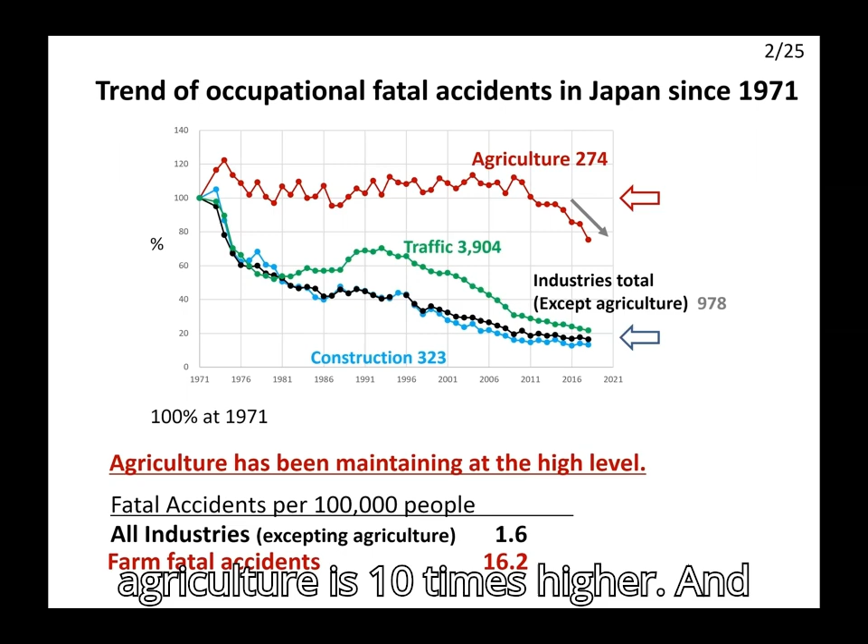Number 3. 60% of farm fatal accidents are caused by agricultural machinery. Among them, farm tractors are the worst. In 2017, 157 people were killed by agricultural vehicles. The injury accidents due to agricultural vehicles exceeded 20,000 per year. Based on the number of tractors, we may estimate 400,000 people are injured by farm tractors in the world.

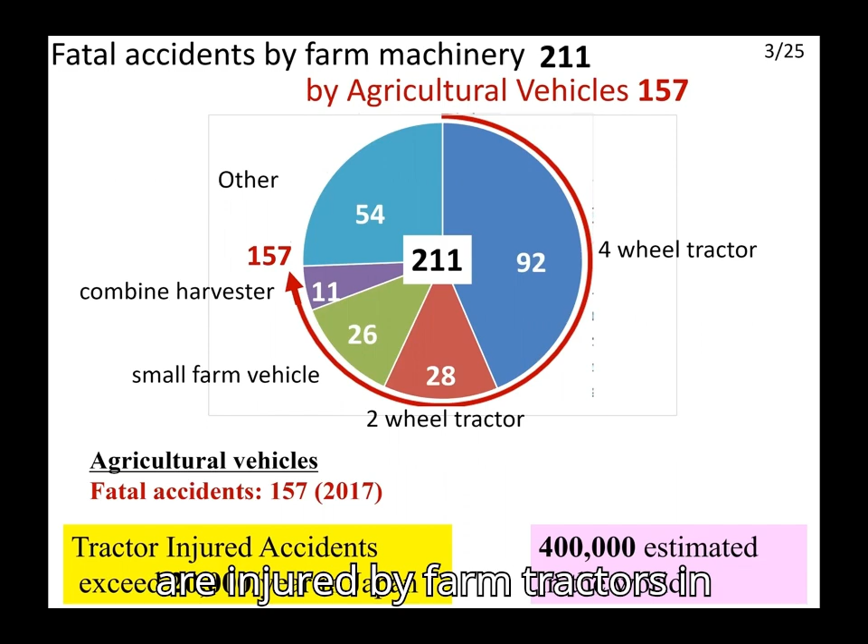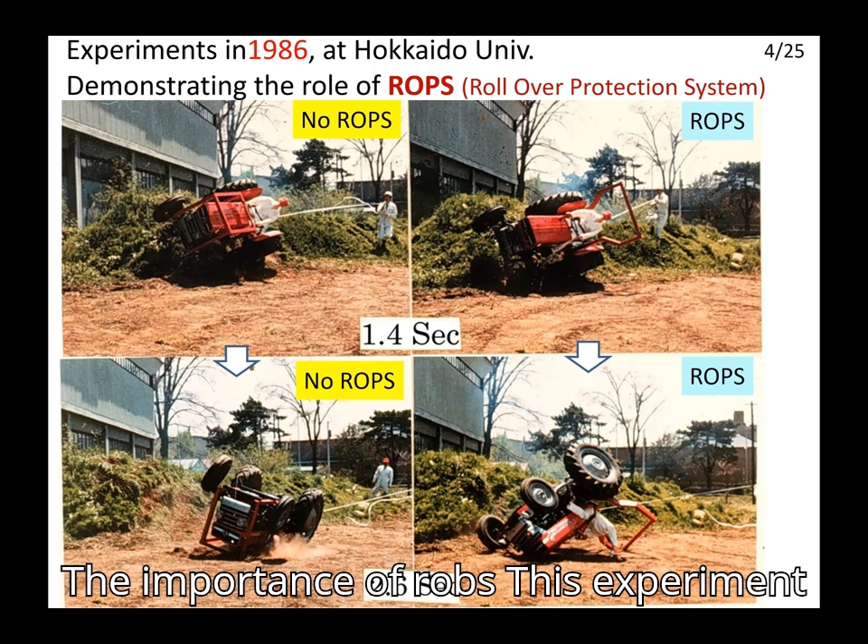Number 4. In the 1980s, ROPS was not popular in Japan. Hokkaido University demonstrated the serious importance of ROPS. This experiment was conducted in 1986. A mannequin was put on the seat.

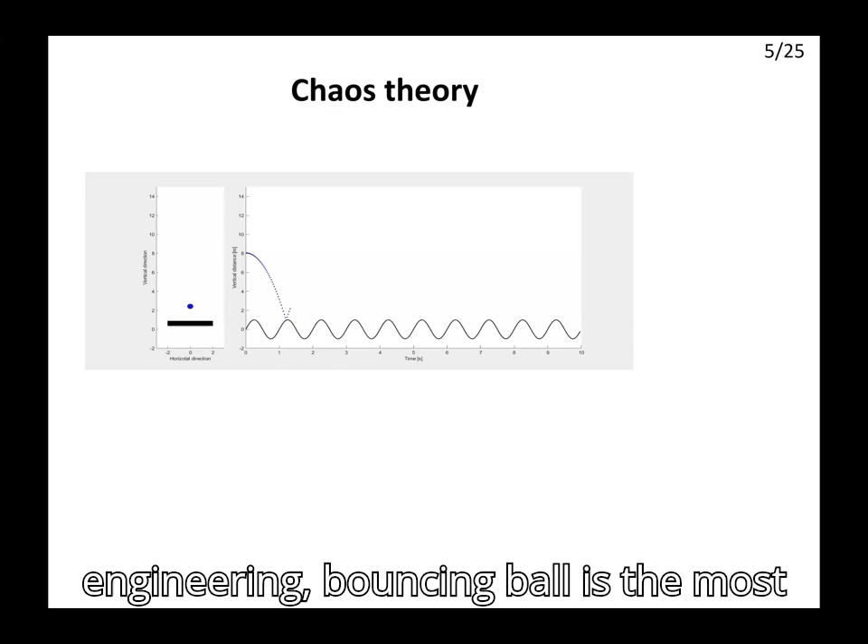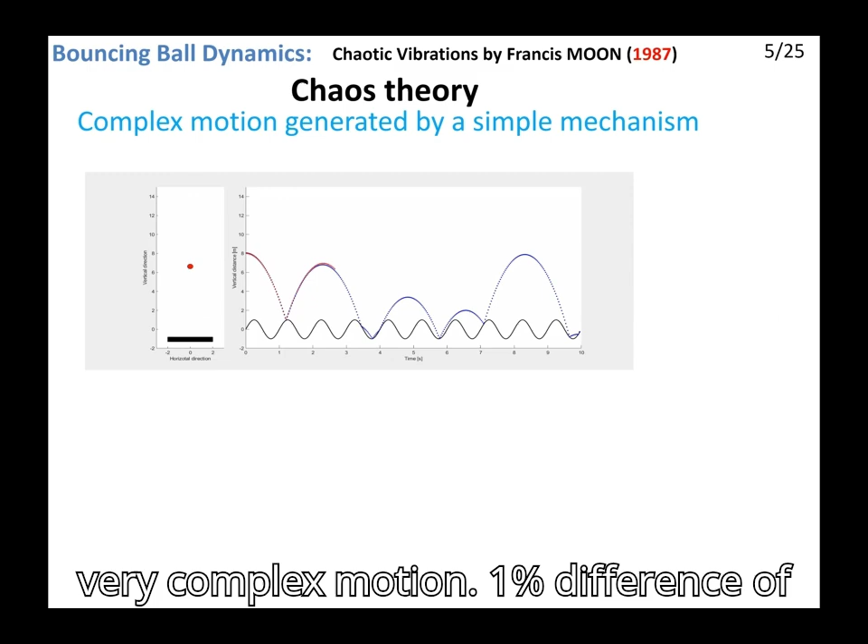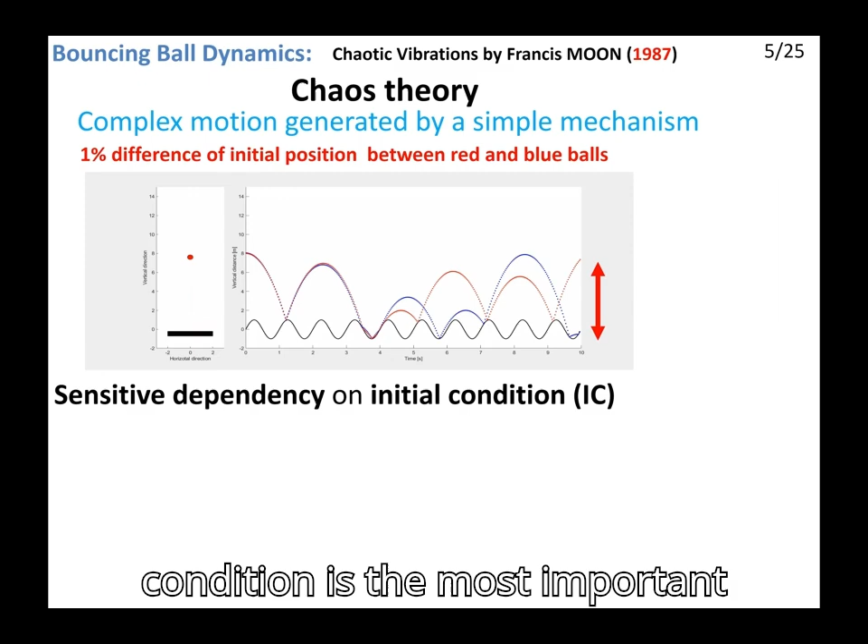Number 5. In mechanical engineering, the bouncing ball is the most popular model to explain chaos theory. I purchased this book at the UC Davis bookstore. A free fall elastic ball repeats collisions with a moving table. The trajectory of the ball shows very complex motion. A 1% difference of initial position evolved exponentially and the two balls showed no relationship. This sensitive dependency on the initial condition is the most important characteristic of deterministic chaos. This causes unexpected, unpredicted consequences even with very small changes of parameters.

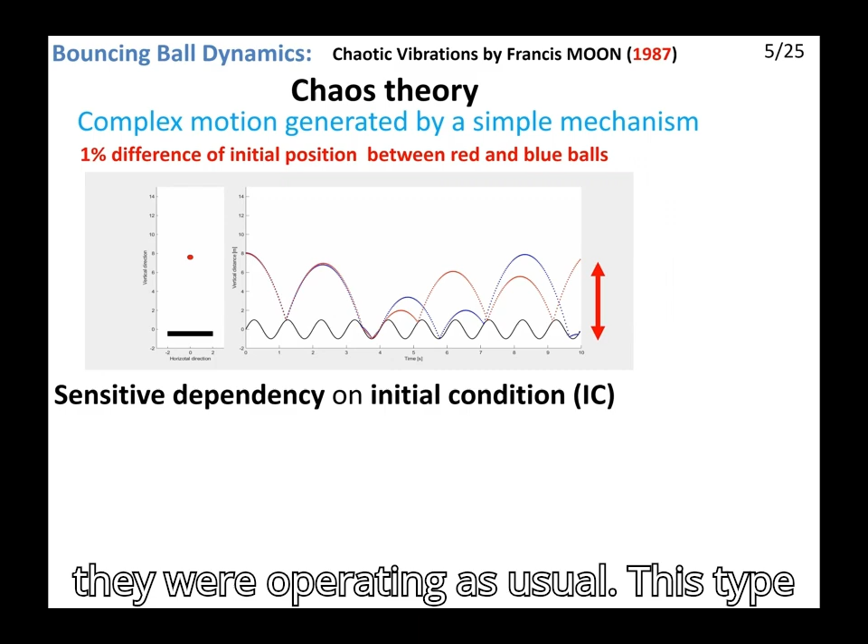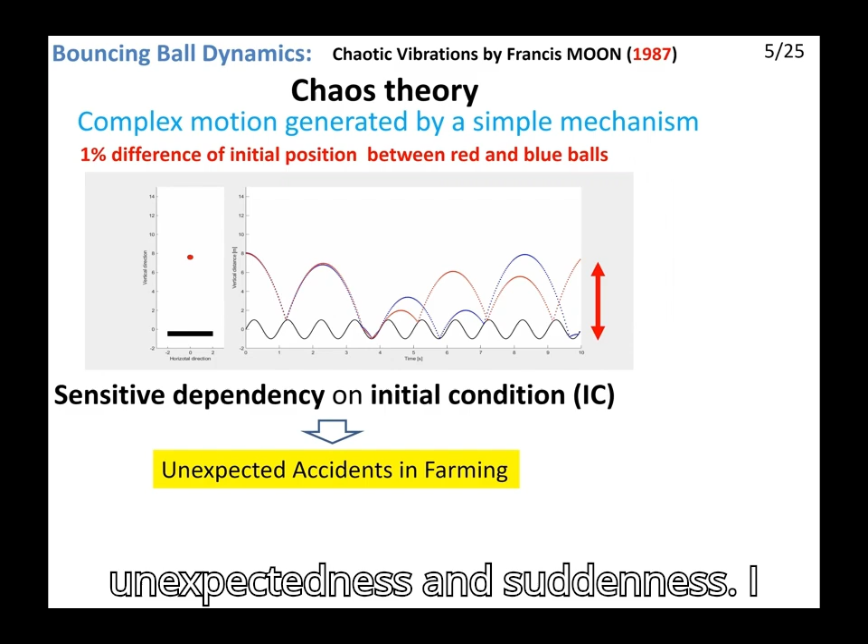Farmers always say that their accidents were not expected because they were operating as usual. This type of mention is typical in many reports from surveying farm accidents. Farming accidents were usually attributed to trivial things and emphasized unexpectedness and suddenness. I conceived that sensitive dependency on parameters in tractors is key to understanding the dangerous behaviors of tractors.

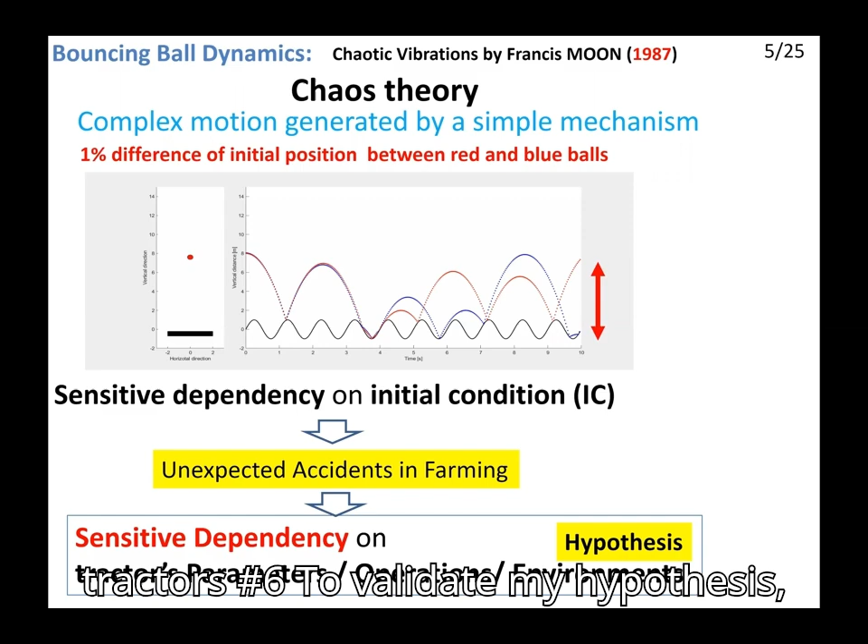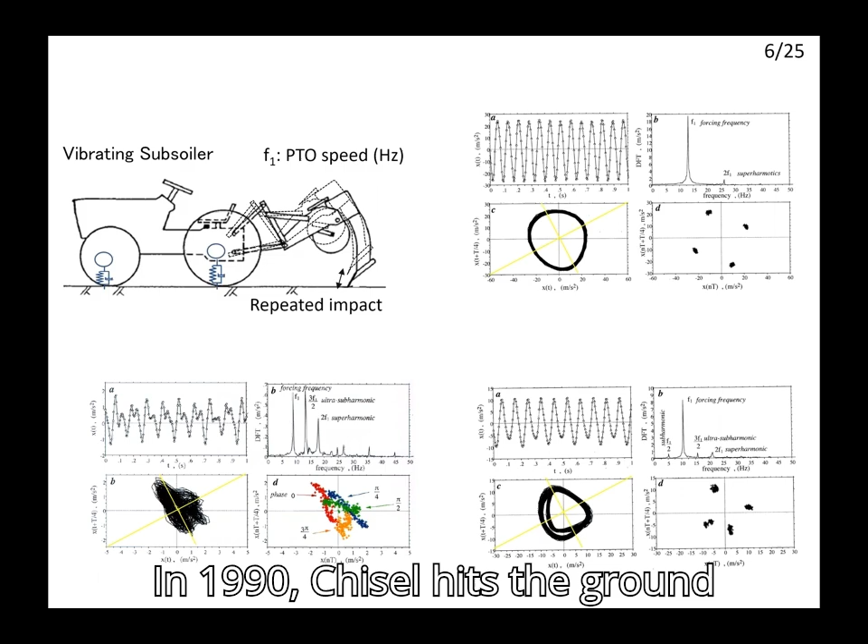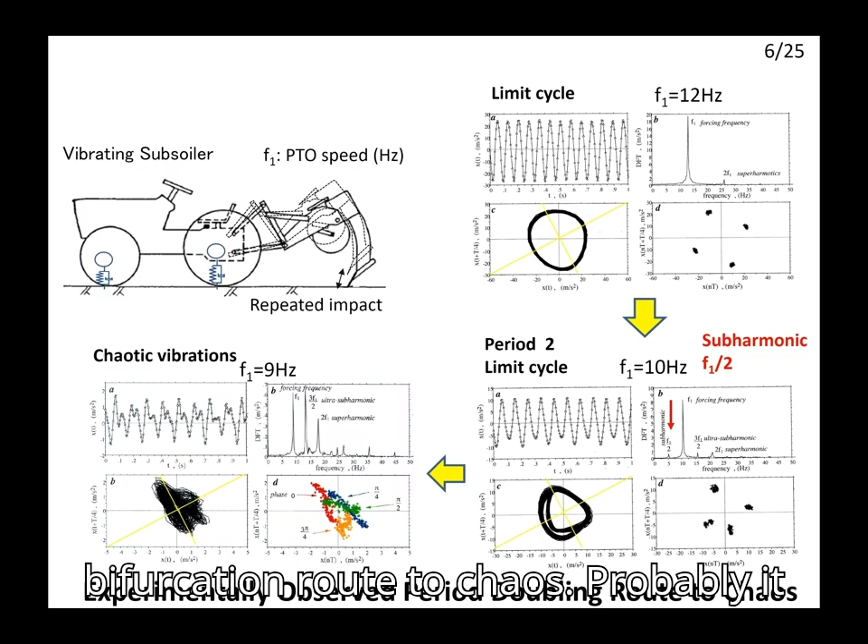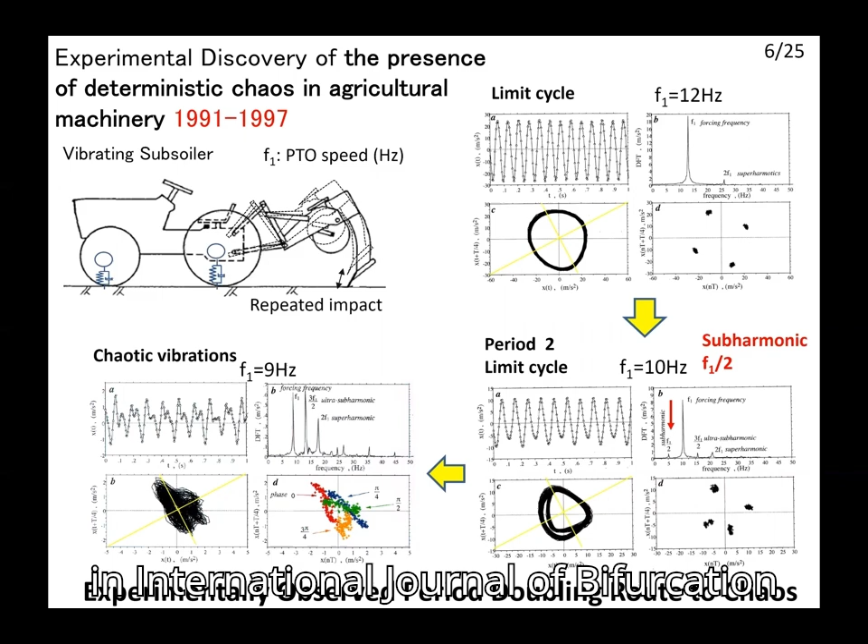Number 6. To validate my hypothesis, I conducted the first experiment with a tractor vibrating subsoiler system after I came back from UCD in 1990. The chisel hits the ground repeatedly with PTO speed. By changing the PTO speed F1, I successfully demonstrated a period doubling bifurcation route to chaos. Probably, it was the very first experiment to detect very clear chaotic vibrations in real machinery. It was published in the International Journal of Bifurcation and Chaos in 1994.

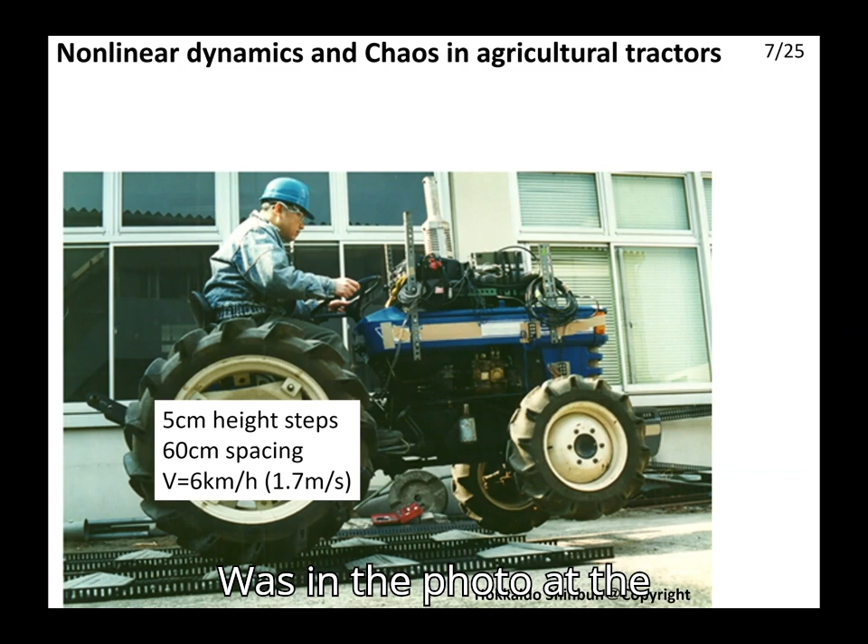Number 7. I moved to TUAT from Hokkaido in 1996 and started to validate the presence of nonlinear dynamics and chaos in agricultural tractors. 5 centimeter height steps were located at 60 centimeter spacing as in the photo. At the specific speed matching its natural frequency, very large seat accelerations such as 4G to 5G occurred. And peak accelerations came up to 10G on my body.

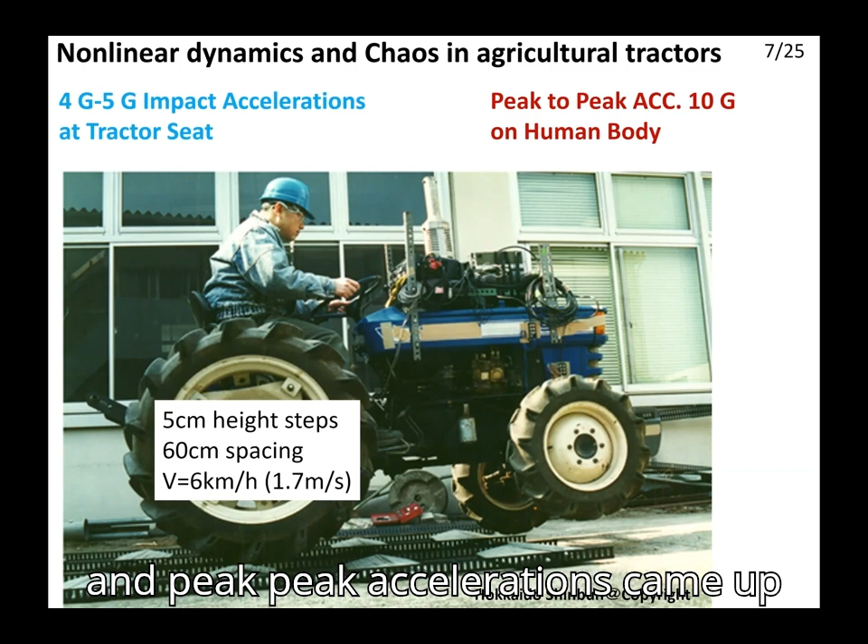Number 8. By changing the tractor velocity, we found natural resonance and subharmonic resonance. The subharmonic resonances occur only in a nonlinear dynamical system. In a 900 kilogram Japanese paddy-field tractor, we demonstrated the presence of nonlinear dynamics by showing the period doubling route to chaos. The experimental results were validated by numerical experiments with my mathematical model.

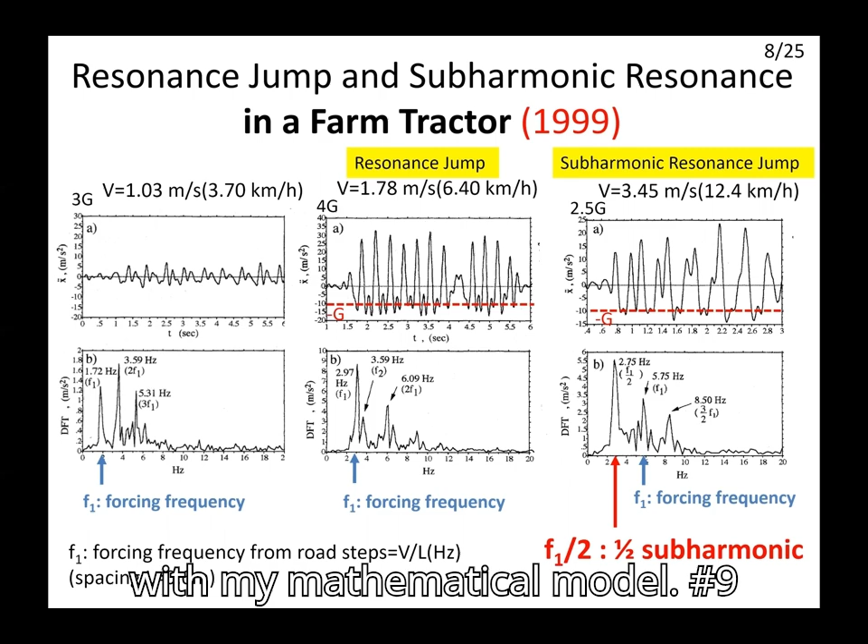Number 9. To confirm the presence of chaotic vibration in conventional large-size agricultural tractors, our collaborator Iowa University conducted the same experiment with a 3.7-ton John Deere tractor. Resonance jumping also occurred and the experimental results were as we mathematically predicted. It was Leroy's PhD work and published in the International Journal of Bifurcation and Chaos in 2000.

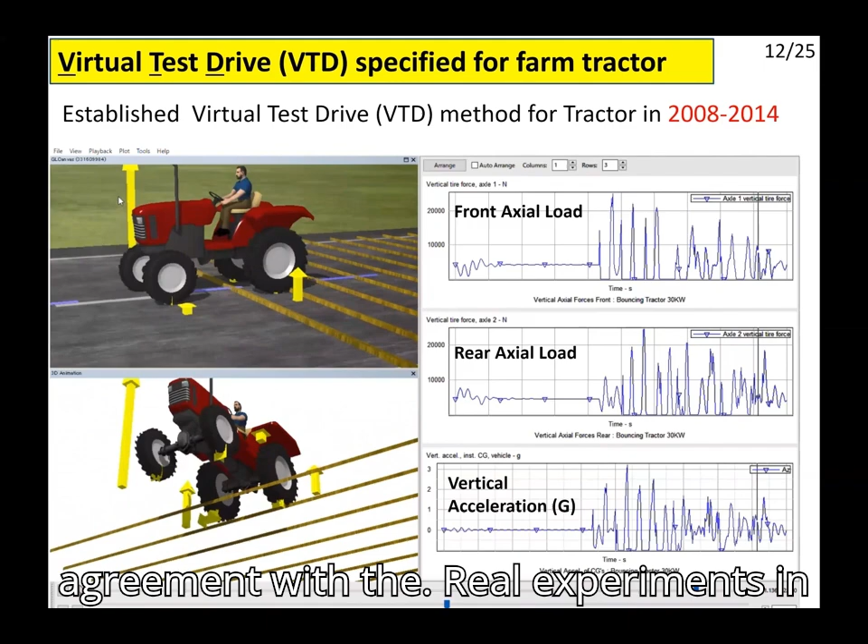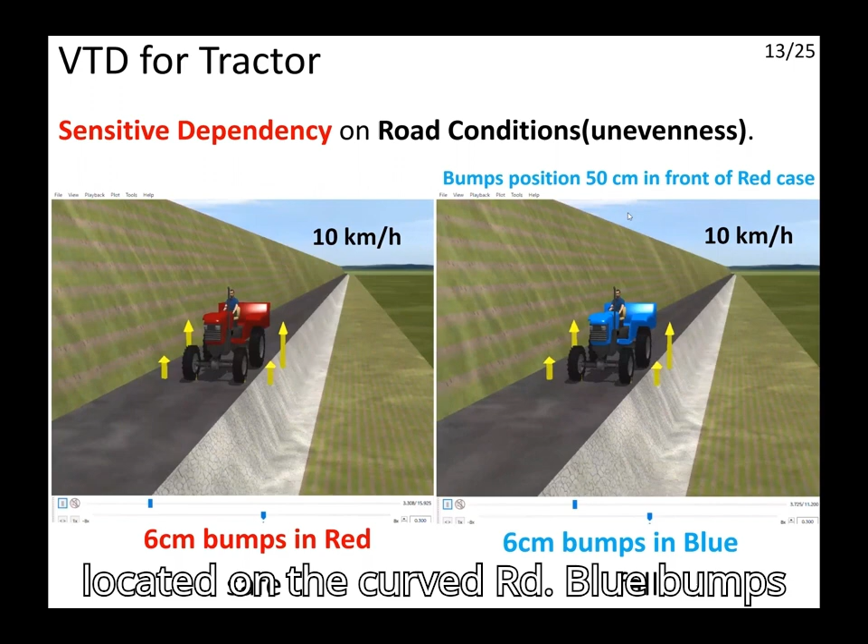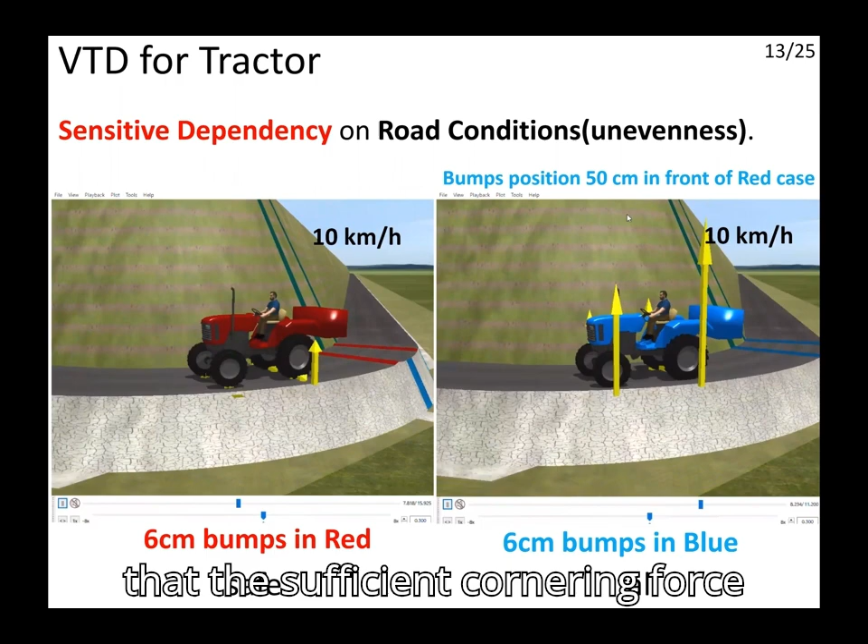We utilized the VTD system to confirm my hypothesis of the sensitive dependency on parameters for tractor driving. Two 6 cm height bumps are located on the curved road. The blue bump is 50 cm in front of the red bump. The blue tractor drops its left front wheel and falls. Even with such small bumps, the axial load on the front tire is significantly reduced so that sufficient cornering force cannot be secured. While the tractor is in the air, the direction of the tractor body can be shifted. After the touchdown, this may cause instability of the tractor.

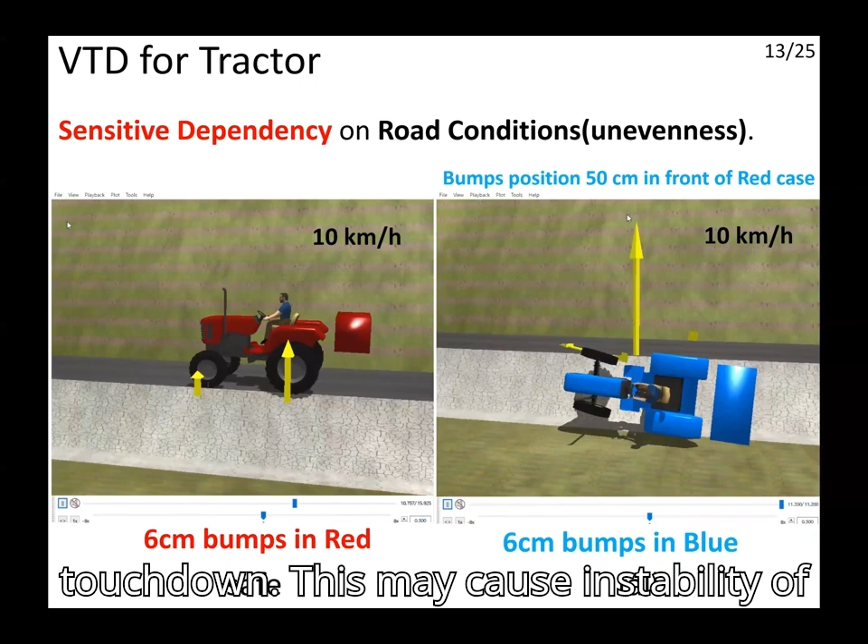Number 14. The report says that when the operator finished the tillage work on the field and exited through the narrow slope to the paved road, the front wheel floated slightly. With that momentum, the left front wheel stepped off the road shoulder. The operator hurriedly turned the steering wheel to the right, but could not return to the original position. It fell to the field about 2.7 m below. In the VTD, with a 0.05 second delay of steering timing, the blue tractor dropped its left front wheel and overturned on the left side slope. This VTD shows the sensitive dependency on steering timing.

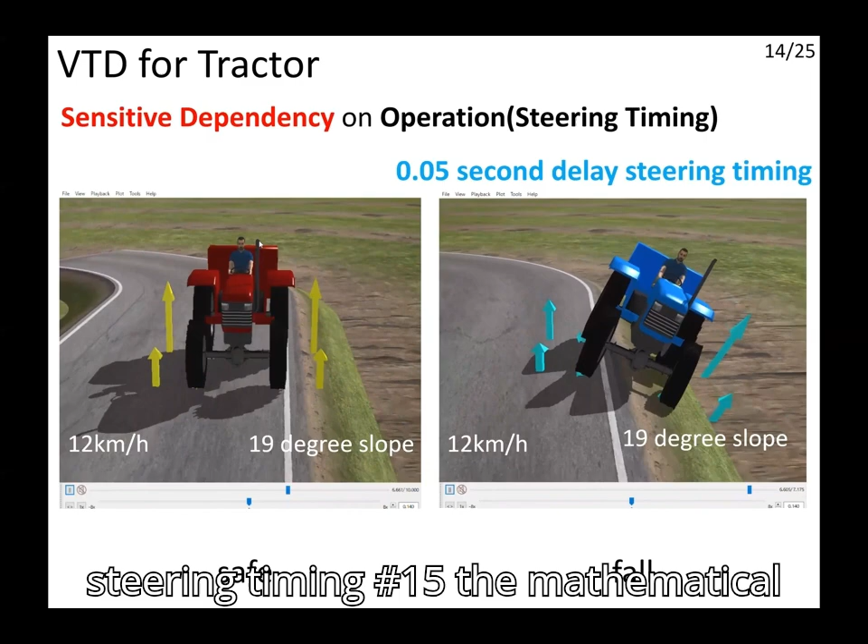Number 15. The mathematical models we have developed were recently published in 2019 and 2020 in Biosystems Engineering, which is the best journal for tractor dynamics.

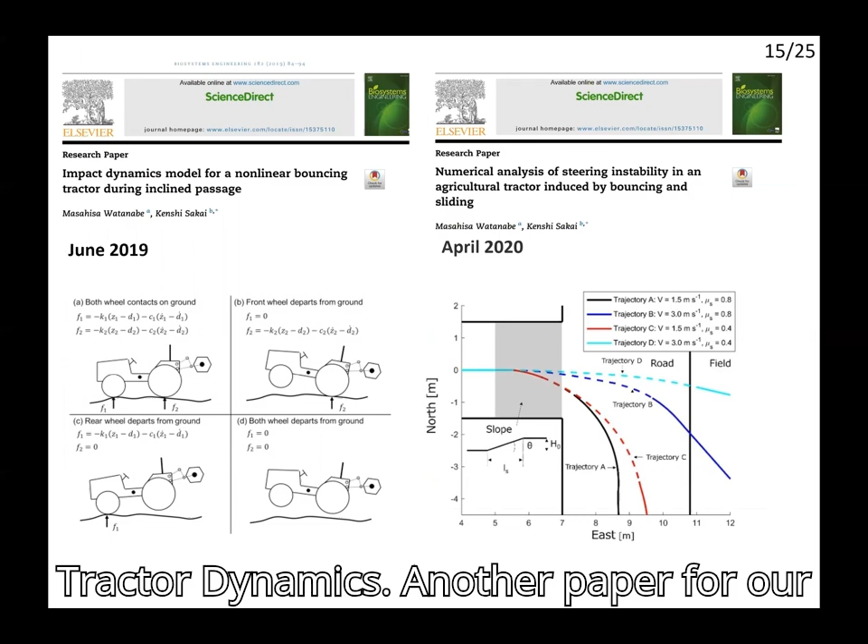Another paper for our novel power hop model was submitted last week to the same journal.

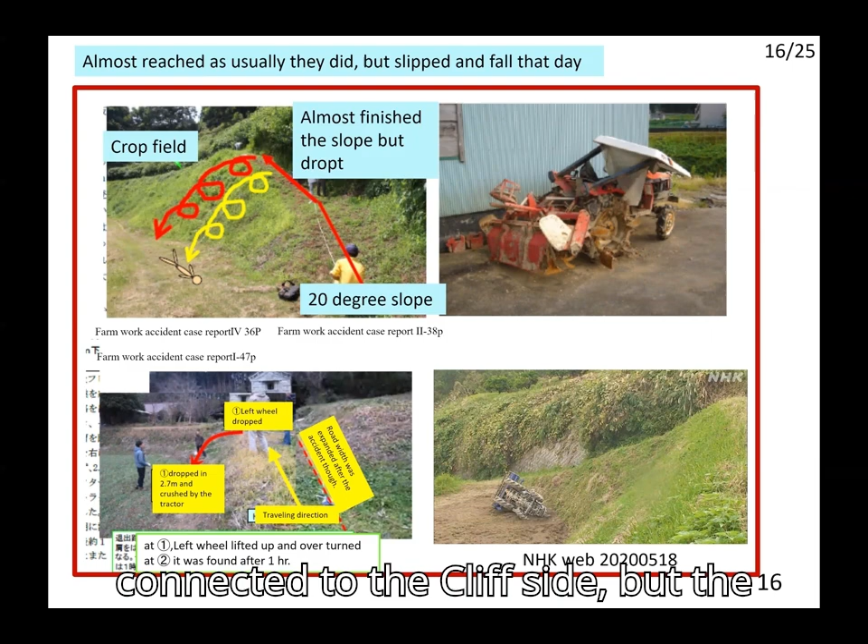Number 16. The photos show the typical type of accidents that occurred on sloppy slopes. According to the report, the farmer said: I thought it would be a little slippery because of the rain, but I climbed a narrow slope to cultivate the fields on the slope. On the way, I slipped and the tractor was about to fall, so I stopped the engine, put my foot on the rotary and connected to the cliff side, but the tractor and I fell down 7 m.

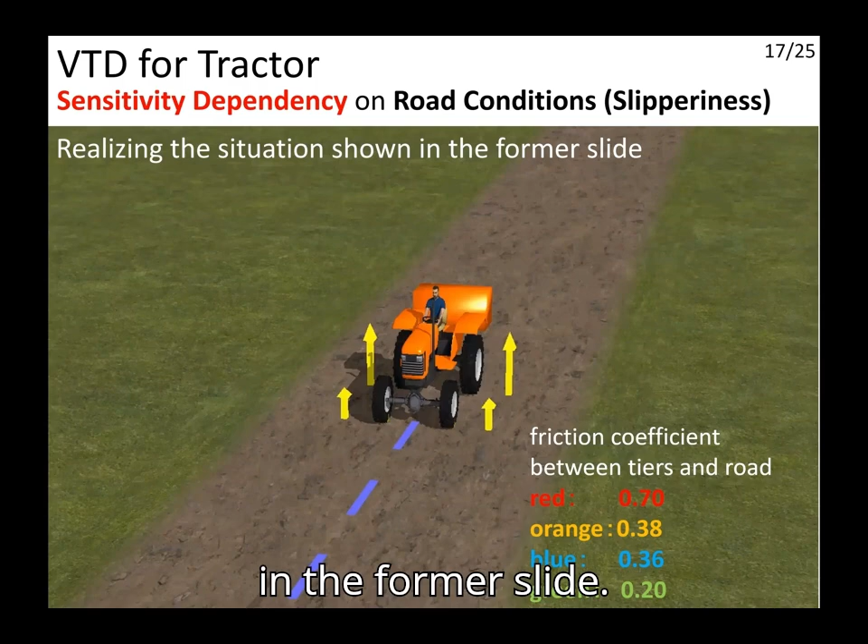Number 17. This virtual test drive simulates the cases in the former slide. 4 different friction coefficients between tire and soil were set as 0.7, red, 0.38, orange, 0.36, blue, and 0.2, green. Red and green correspond to very good and very bad conditions, respectively, and both of them have no problem in terms of tractor accidents.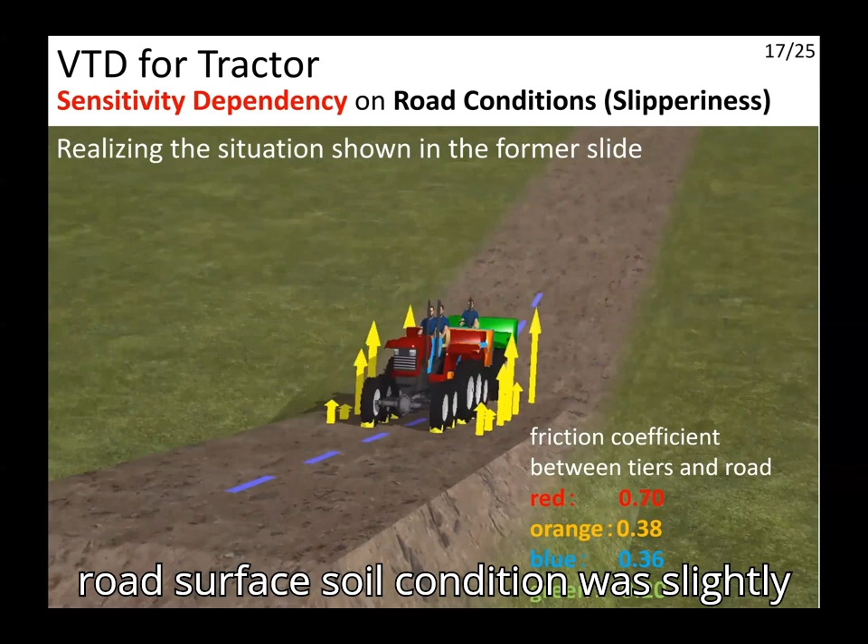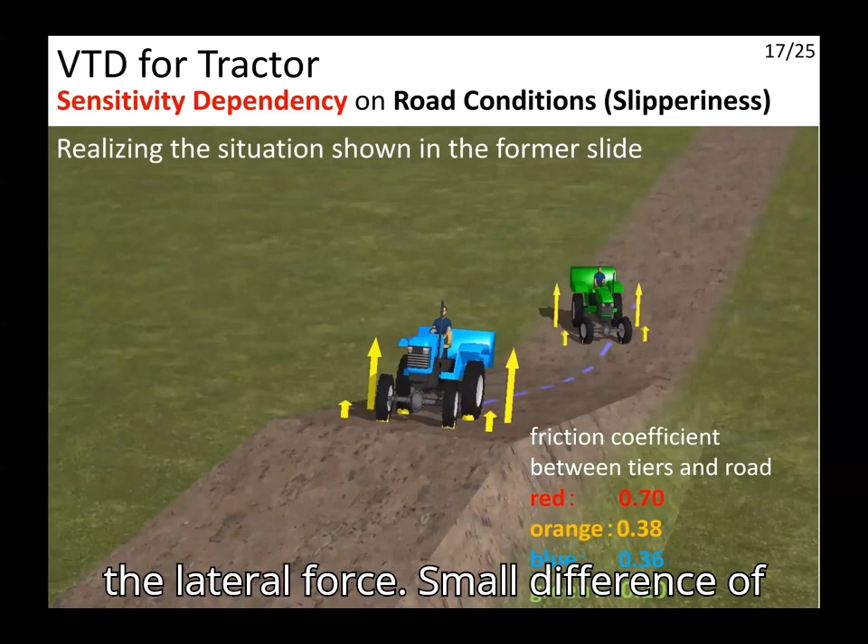That farmer used to go up that slope if the rain was not so heavy. But on that day, the road surface soil condition was slightly worse than he expected. It means the condition was not orange but blue. As the traction force acting longitudinally reached the maximum friction force on that sloppy slope, there was no friction force to resist the lateral force. Small difference of road conditions bifurcated 2 different consequences such as safe and fatality. This VTD shows the sensitivity on road surface conditions, slipperiness.

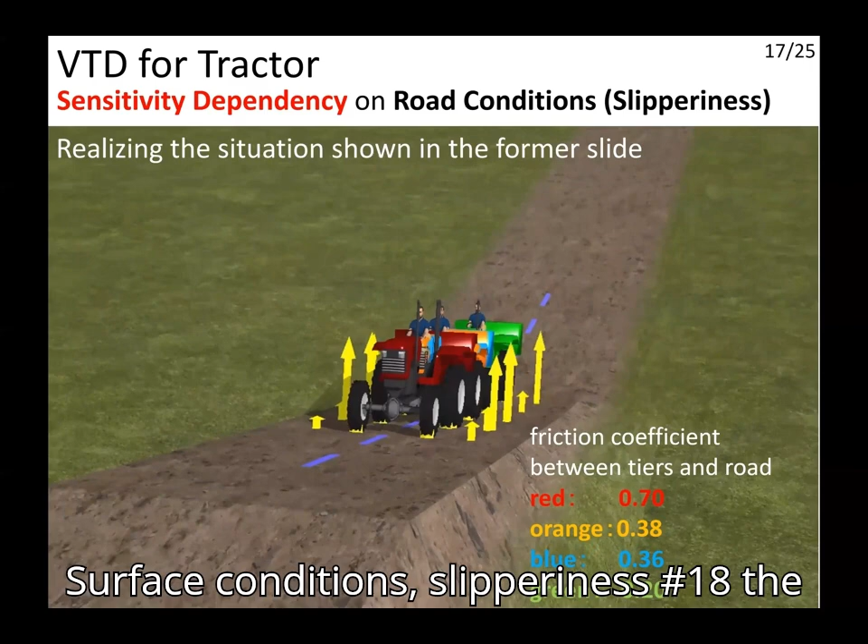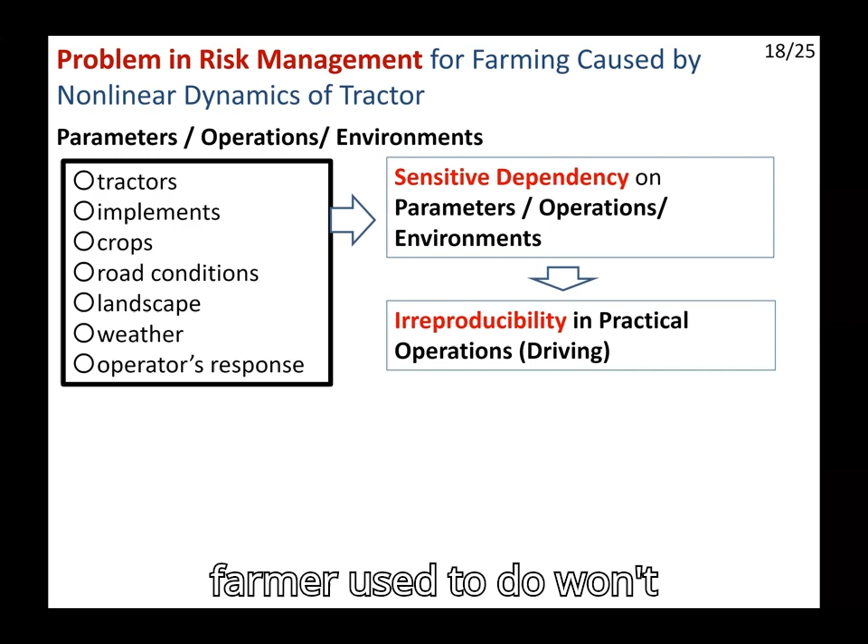Number 18. The listed parameters can be sources of the sensitive dependency of tractor behaviors. The sensitivity causes irreproducibility in driving. Therefore, sometimes, the ways which a farmer used to do won't work. They cause a problem in risk management, because it is difficult to identify the risks corresponding to individual farmers with individual circumstances. Difficulty of risk identification is the problem. To overcome the problem, we propose the strategy self-risk identification.

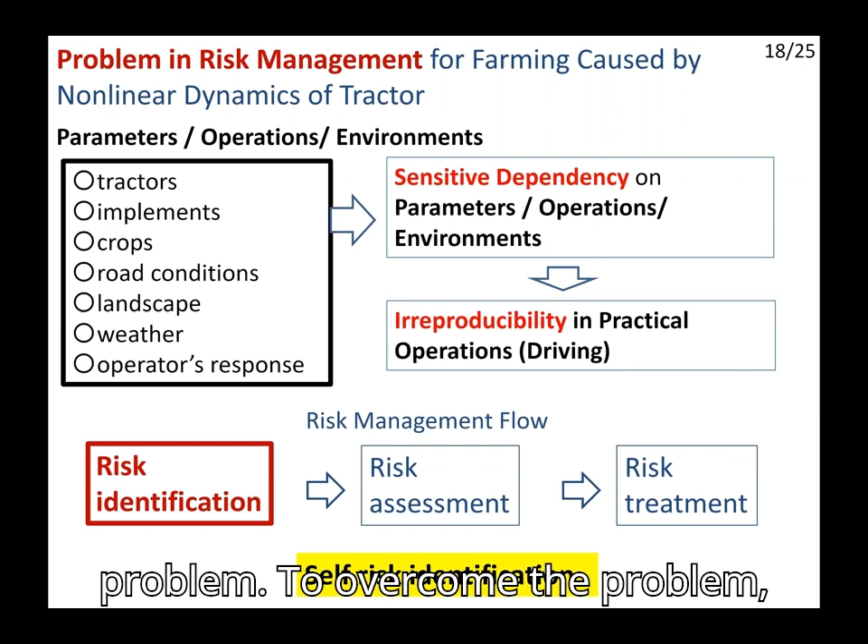Number 19. Self-risk identification is the approach that farmers can get necessary information to identify the risks in their own farms and working environments. Tractor driving simulator and tractor driving recorder are 2 core technologies to be developed. Conventional driving simulators and driving recorders are useless for agricultural tractors, because the dynamics are quite different between car and farm tractor. We have to specify them to farm tractors.

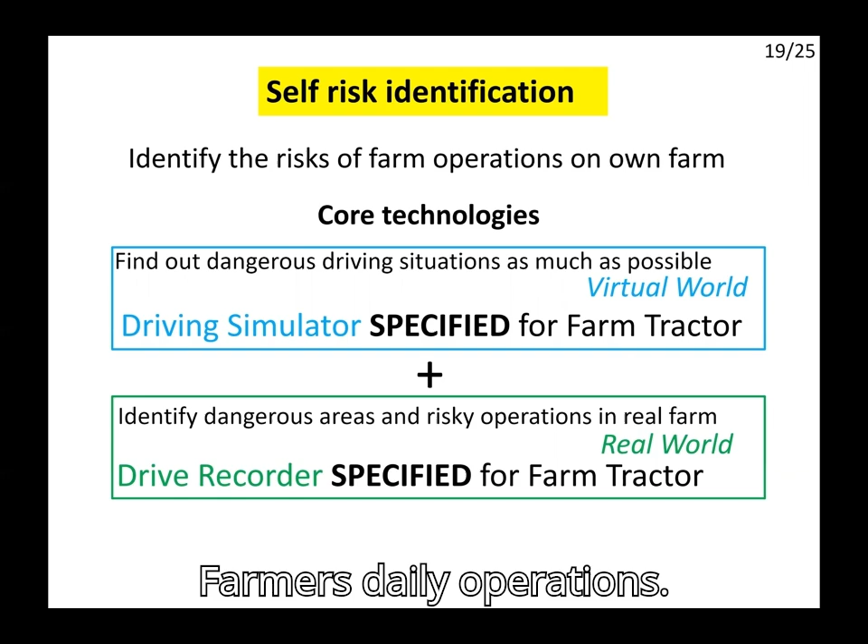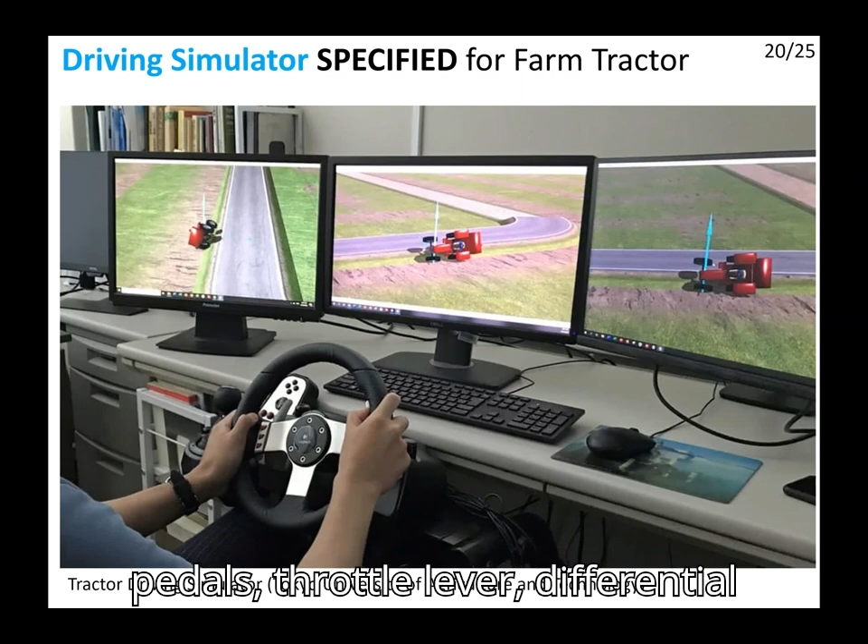We use the tractor driving simulator to find out dangerous and risky situations under given conditions by each individual farmer with VTD in virtual space. The tractor driving recorder is used to visualize the risky events, location, and operations from the data obtained in farmers' daily operations. This is our current prototype of tractor driving simulator. 2 brake pedals, throttle lever, and differential lock switch are implemented in the cockpit.

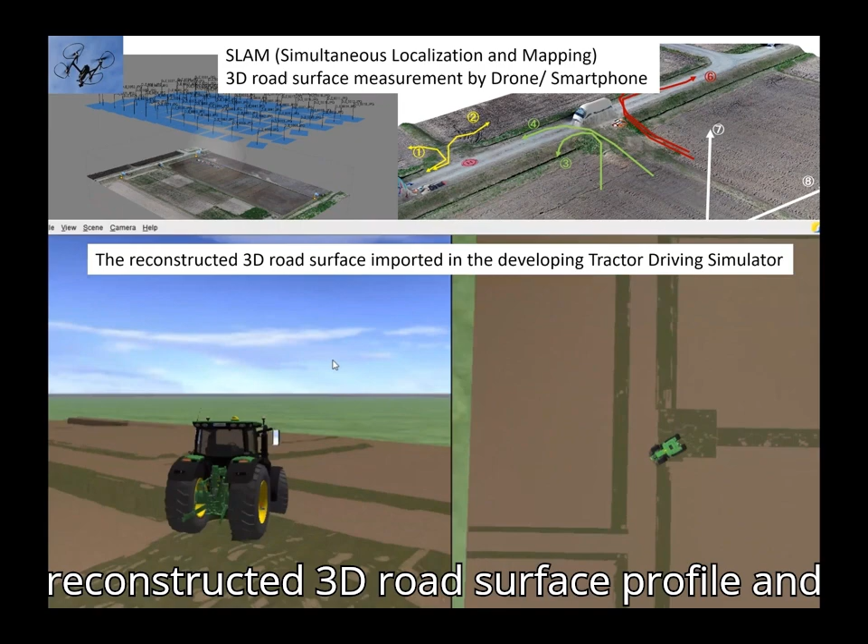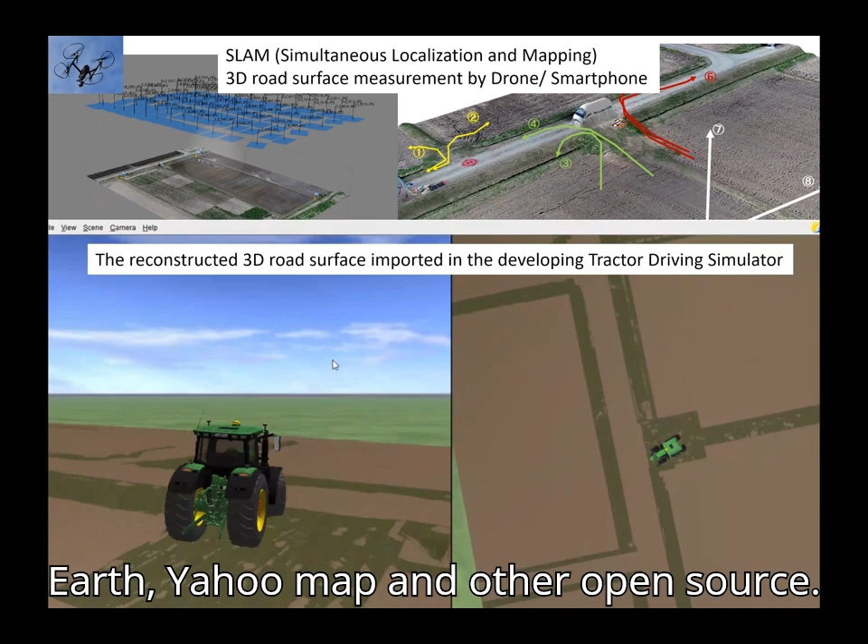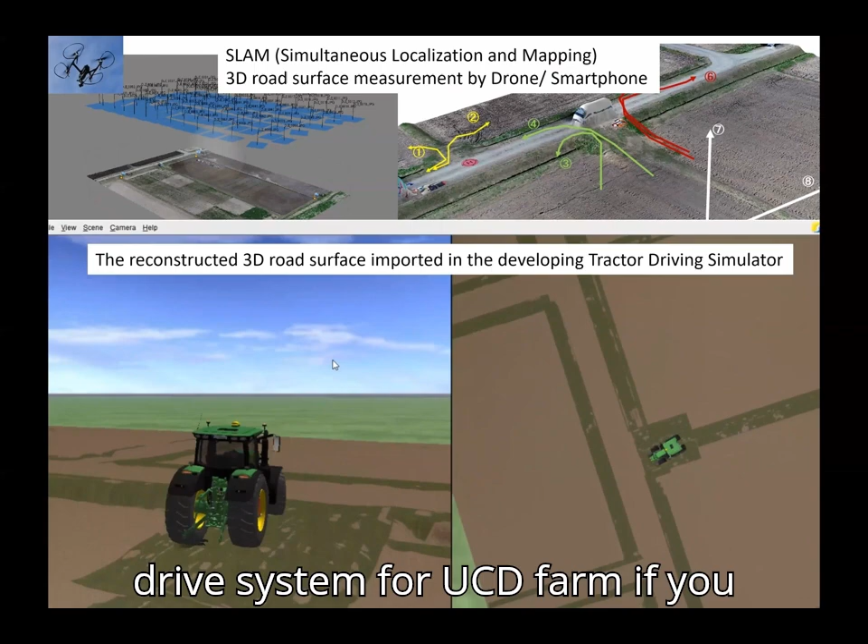Number 21. From the drone images taken in Fukushima Prefecture, we reconstructed the 3D road surface profile and imported it to the Tractor Driving Simulator, TDS. TDS can import and synchronize the digital map from Google Earth, Yahoo Map, and other open sources. I was able to import UCD West Center's roads from Google Earth. It would be possible to apply our virtual test drive system for UCD Farm, if you could get drone or moving capture images.

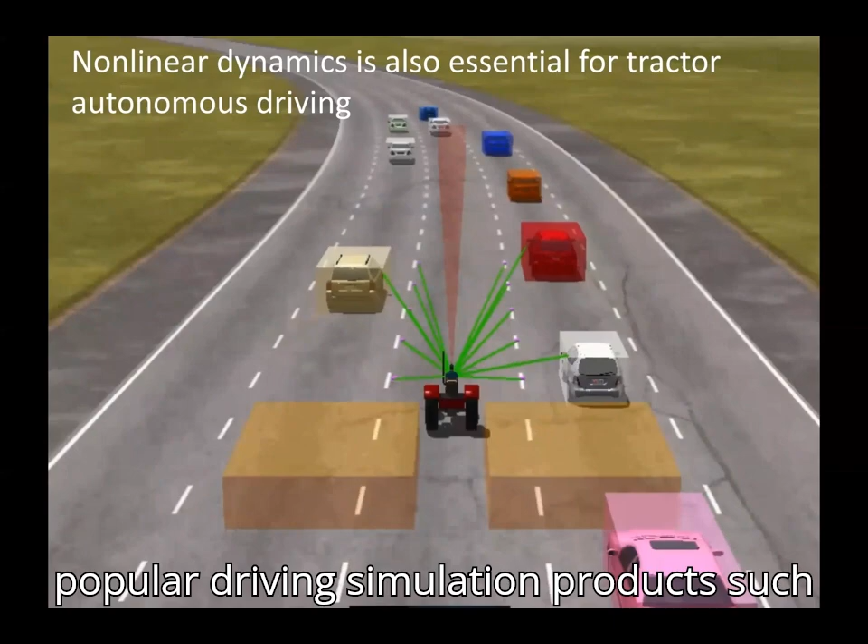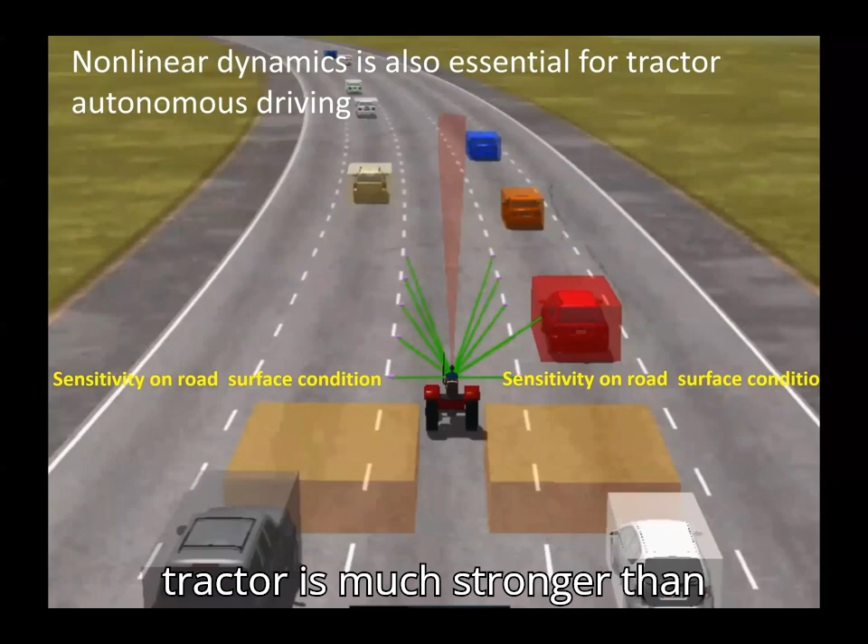Number 22. Our tractor driving simulator, TDS, is built up with two popular driving simulation products such as CarSim and CarMaker. They are used to develop ADAS, Advanced Driver Assistance System, for cars. In applying ADAS, the tractor responds to the road roughness in very sensitive ways, as nonlinearity of the tractor is much stronger than a conventional car. As well as safety driving research, nonlinear dynamics is obviously essential for developing autonomous driving technology of farm tractors.

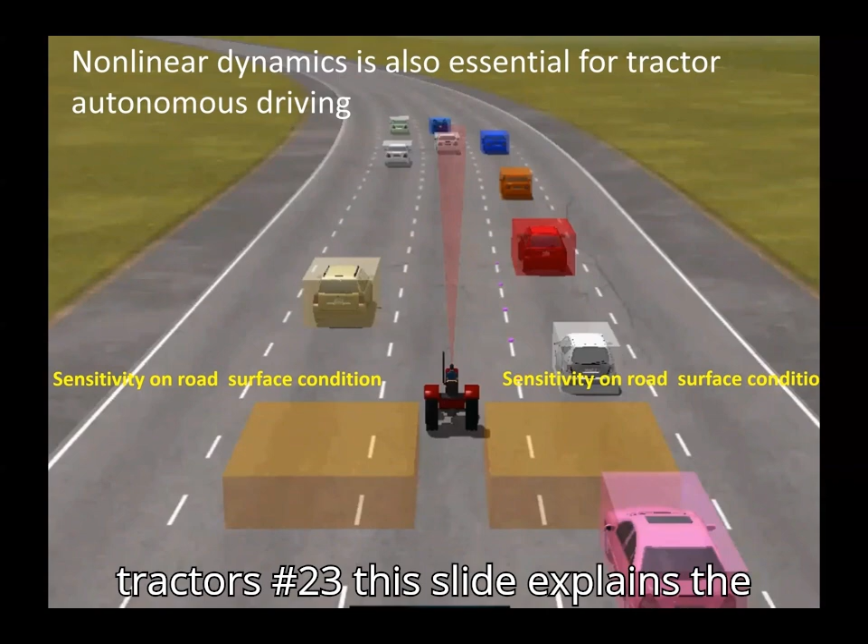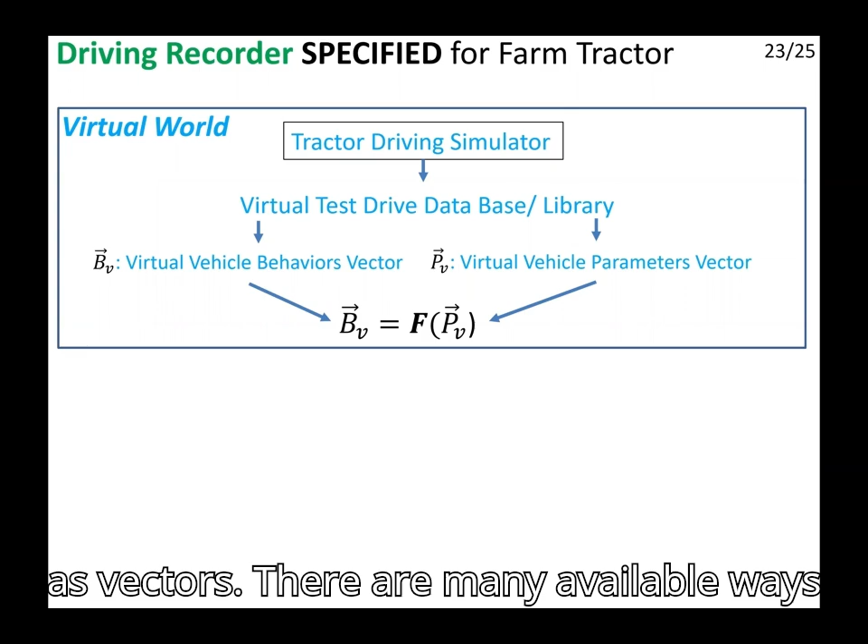Number 23. This slide explains the role of the tractor driving recorder for self-risk identification. In virtual space, we can get a data set of vehicle parameters PV and vehicle behaviors BV. Both of them are expressed as vectors. There are many available ways to identify the map F. In real space, we can get a data set of vehicle parameters PR and vehicle behaviors BR. We can also get map F. To determine the map F is the key technology to realize a drive recorder specified for farm tractors.

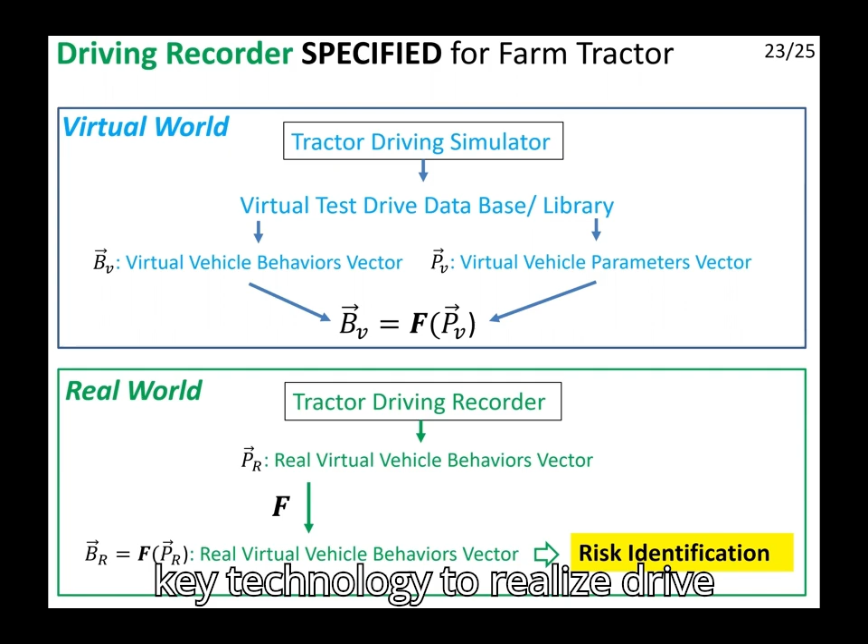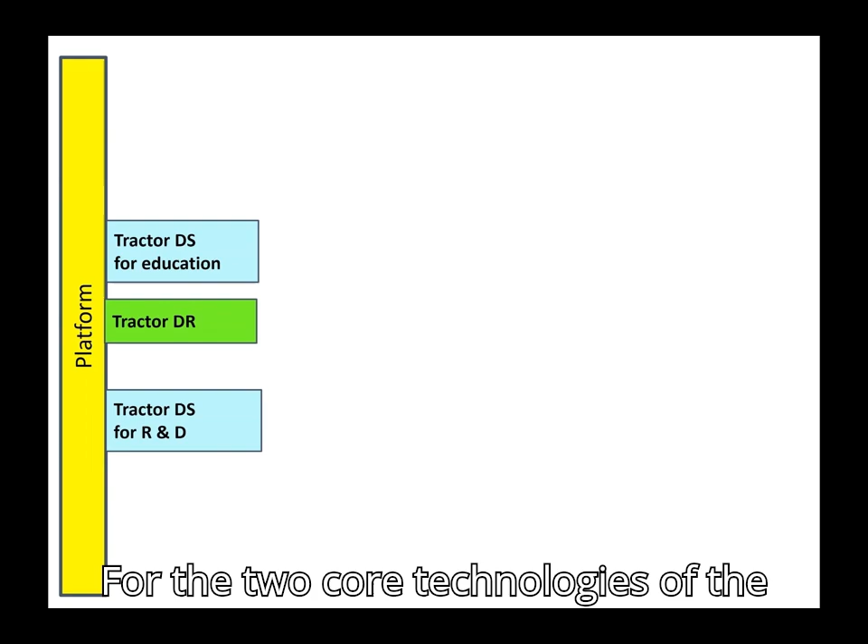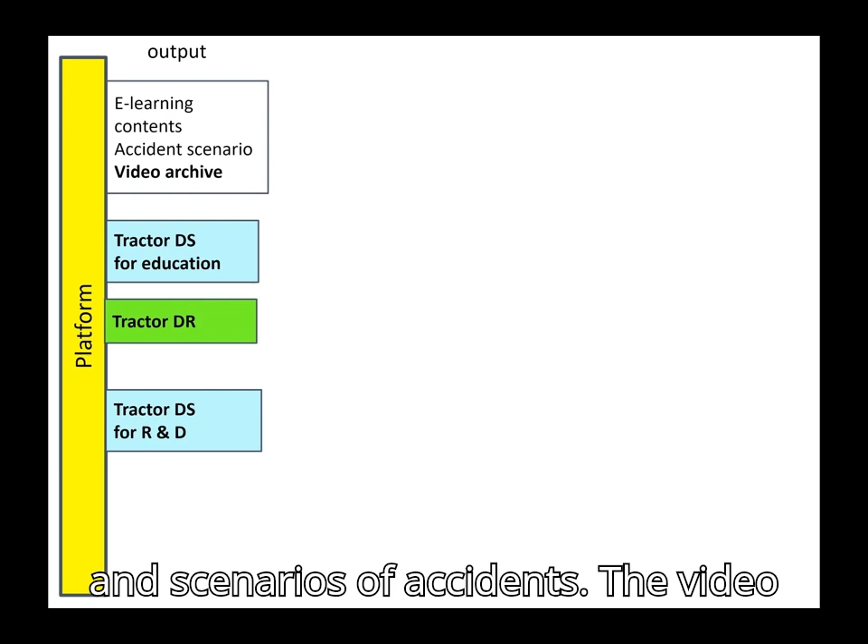Number 24. Tractor Driving Simulator, TDS, and Tractor Driving Recorder, TDR, are the two core technologies of the platform. TDS is used to create videos for educational purposes to scientifically explain the mechanism of tractor accidents, many cases, episodes, and scenarios of accidents. The video archive and library will be useful for farmers and schools at any level. TDS and the theoretical model are useful for academic, research and development sectors.

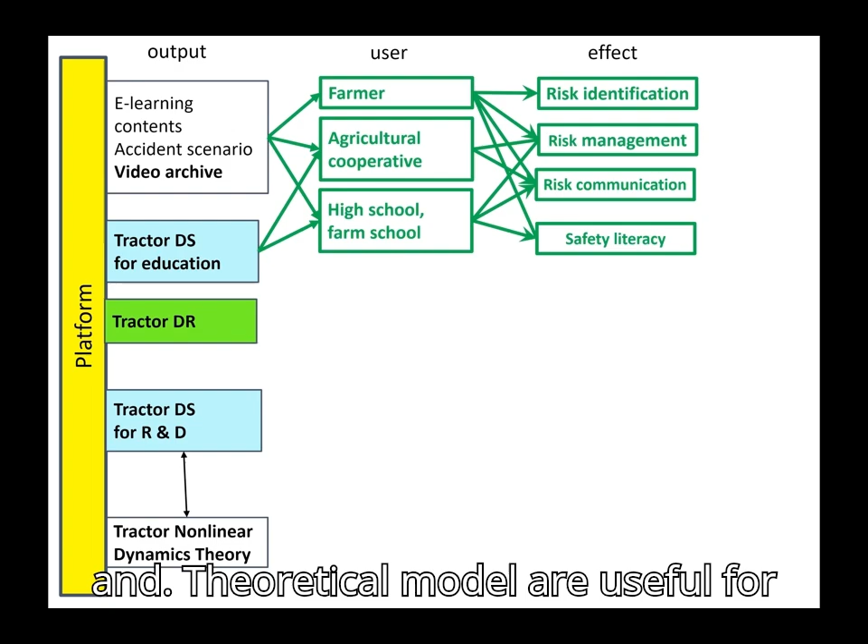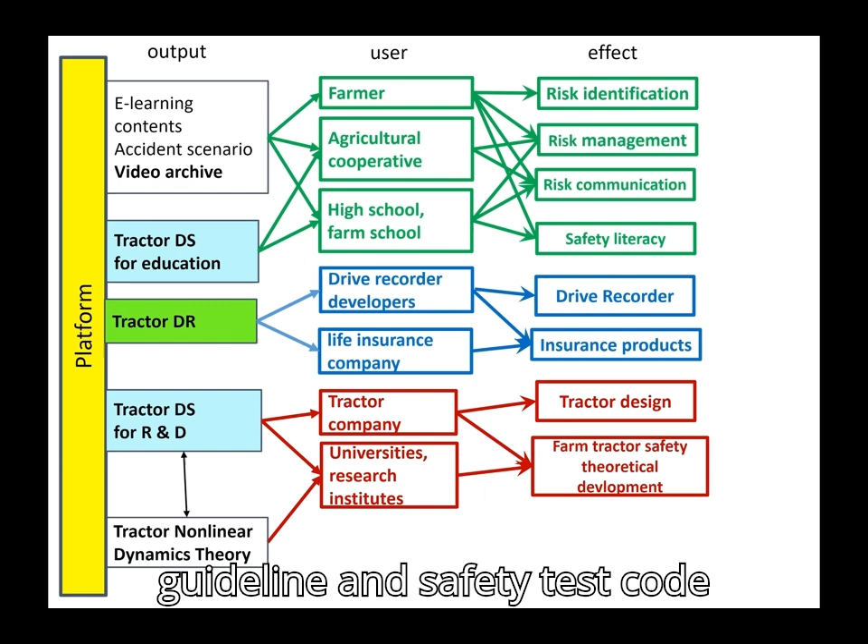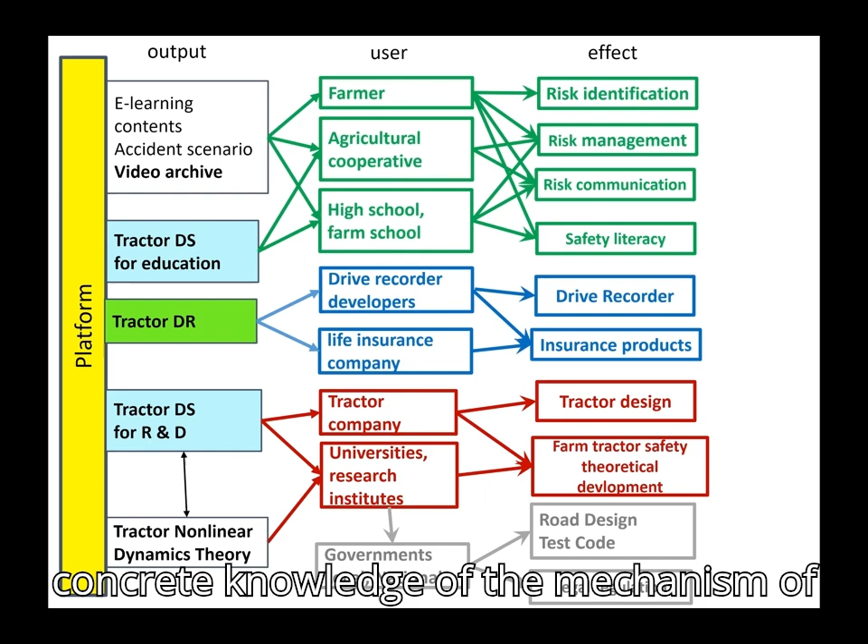The results from our tractor driving recorder development will give the essential information, criteria, and specifications to be satisfied by the tractor driving recorder, TDR. This information is useful not only for producers but also for insurance companies. Road design guidelines and safety test codes considering nonlinear dynamics are expected. It is very important for us, agricultural engineers, to give concrete knowledge of the mechanism of tractor accidents.

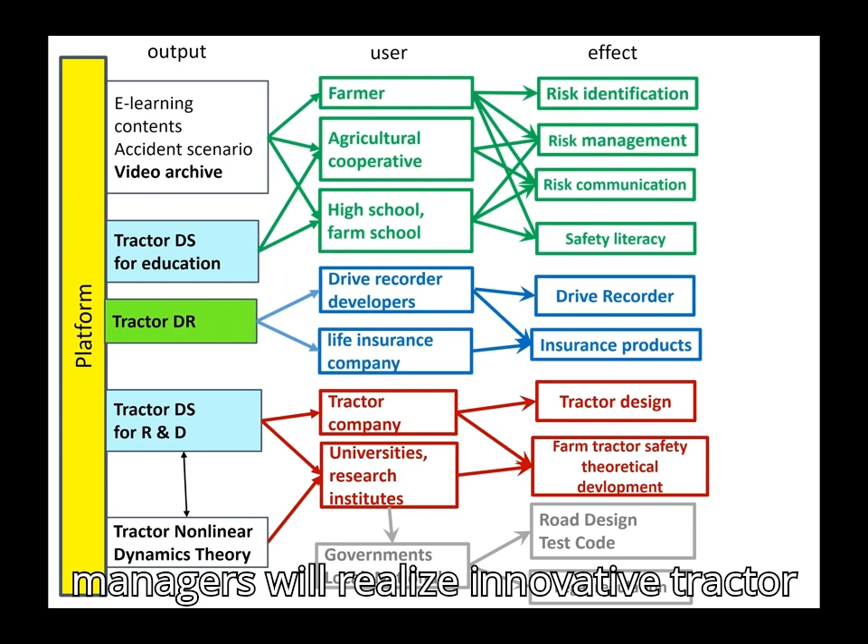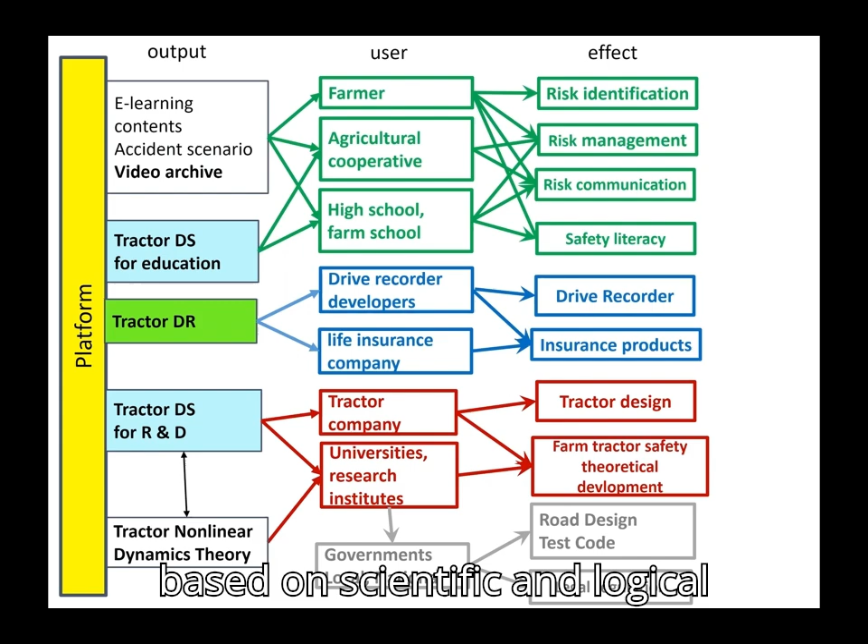Based on the concrete knowledge, we hope that tractor engineers, designers, and farming managers will realize innovative tractor designs and farming systems. We also hope that rational regulations, guidelines, and laws will be established, based on scientific and logical information. Multidimensional and synergistic contributions will be necessary to achieve the ultimate goal.